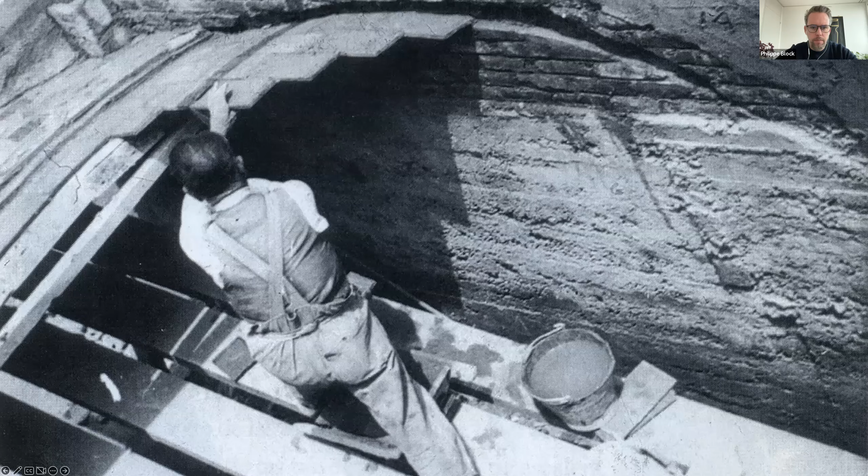Yes, it's perfect. Do you have videos or? It should work though. It's okay. Yeah. Well, okay, I'll quickly try so that we can see. That works now. Yes. Yeah. Okay.

I see Philippe is on. Maybe he has some technical issues. We can't see. Okay. Yeah.

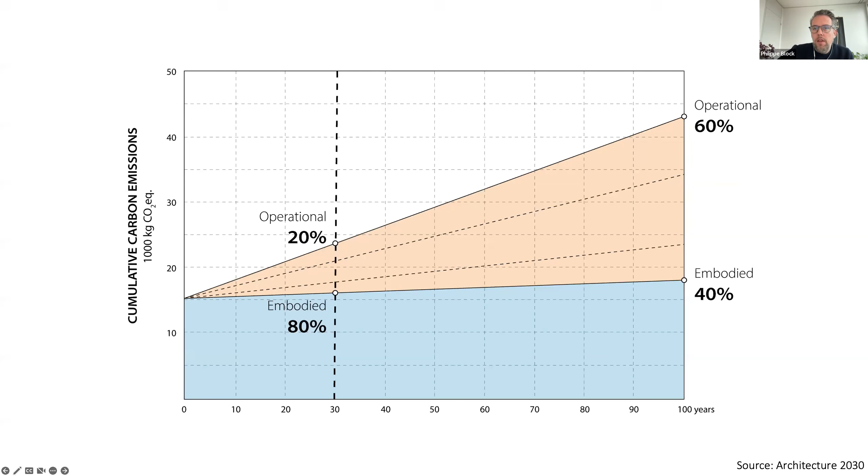Global waste production, particularly construction demolition waste, is adding there, and then also energy. But what I will be talking about today is what I believe is the key bottleneck, the remaining bottleneck, the embodied emissions. Why I say that for me this is really the key bottleneck is because there is actually a rather straightforward solution. There has been for the operational energy.

So there has been so much research, so much development on efficient heating, cooling systems, on better insulation, but also if we were to go to renewable sources of energy. And I just recently, maybe that is old news for you, but I read in the news that the largest solar energy plant was just opened in China. So that is exactly what I'm talking about, that if we can reduce the impact of that energy, then actually, theoretically, we would have a solution to solve the entire operational energy emissions.

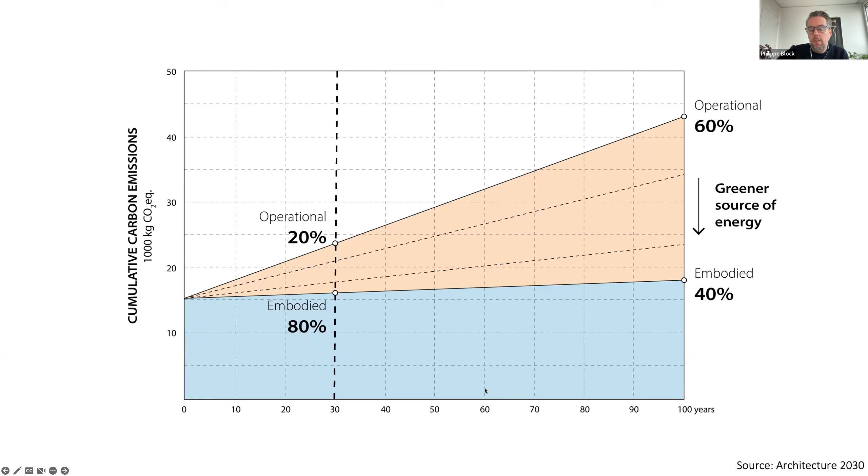So the first one is the one that most people focus on, which is to change the materials that we use, to go to low carbon materials. And I will talk about this later as well. The second one can have a much larger impact, that is actually to reduce the amount of materials altogether that we need. And that's where structural optimization, structural design, appropriate design comes in. And then the last lever, this one, I believe, is probably one of the most important ones indeed, is to actually expand the lifetime of your resources, your components, your structures. So the last one has to do with, of course, circularity and circular thinking.

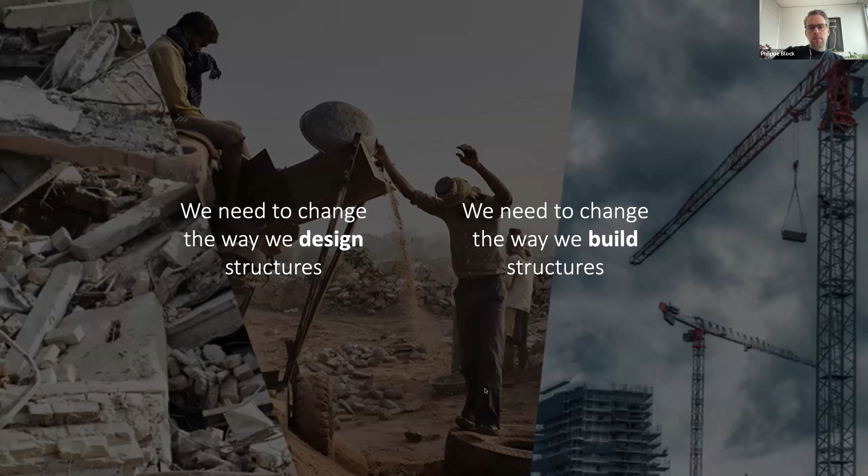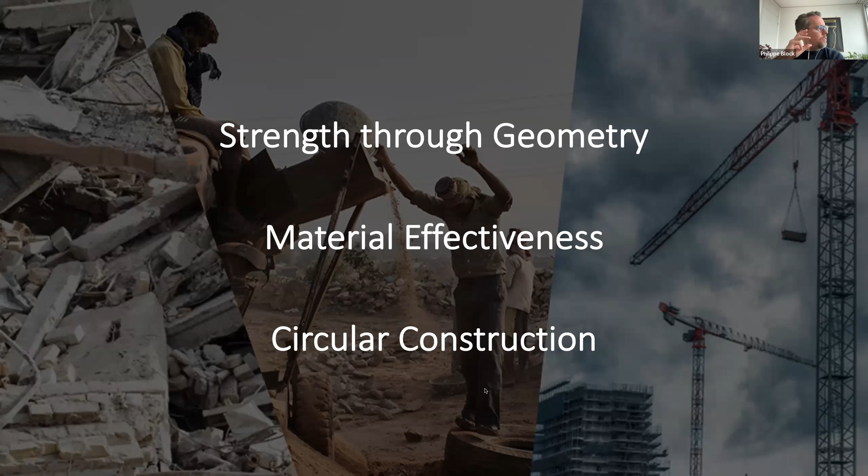So the first one we call strength through geometry. The second one is material effectiveness. Already do notice that I use the word effectiveness and not efficiency, because efficiency often is referred to as lighter, but building lighter, or less material, is not necessarily always solving your problem. If you use very high impact, carbon footprint materials, but very little of them, it might actually cancel out the effect. And then the last one, I will show you how I really believe that we have to also fully embrace circular construction and how we do this in our work.

So the first one, strength through geometry. Sorry for those of you that I have seen already some of my presentations, but I want to set the stage and show that I believe very much in learning from the past and in also assessing traditional techniques, things that make sense, things that were realized in a time where there were constraints, when not anything was possible as in the last decade.

And this is such a beautiful technology that somehow was forgotten, how to build these vaulted geometries from the past, why Gothic cathedrals are still standing after 500 years and so on. So these beautiful structures stand because they have a good geometry, not because you use high strength materials or you reinforce them in very clever ways. No, because they have this structural geometry that makes them stable and resilient after centuries.

But considering that these shells are literally proportionally as thin as an eggshell, this was for me an important trigger and motivation to bring this knowledge back to modern design and engineering. So in order to do that, we have spent the first 10 years. Now I've been almost 14 years at ETH Zurich as professor. And the first 10 years we spent building a lot of prototypes and pavilions to really push ourselves, but also push the acceptance and the understanding outside.

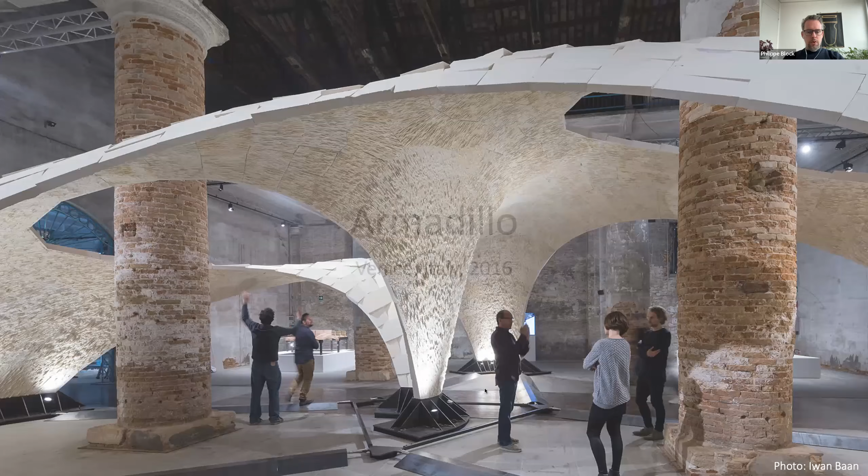So the first project that I wanted to show in the context of strength through geometry is the Armadillo Vault. What you're looking at is a stone vault, unreinforced, out of 399 cut pieces of stone that is assembled without mortar, without glue, without reinforcement. Why I start here is because this is an extremely pure structure following the same logic as why the cathedrals are still standing. And we did this to make that point, to show, haven't we forgotten something, and shouldn't we reintroduce structural geometry to activate humble materials in a safe way, again, as was done in the past.

But the background for this is a long development of tools that allow us to rediscover that structural geometry. So tools based on graphic statics. Again, this will be the topic of the second week of next week. I will be talking about how these tools allow you to, in an open way, really understand how the forces flow by manipulating them and so on. And these tools were then translated into a tool called Rhino Vault by my former colleague, Matthias Rippmann. What we want to do there, and this will be a focus next week, is show how I think it is very important to not build black boxes of tools where you don't fully understand all the parameters, but we try to actually clarify how these things are being developed.

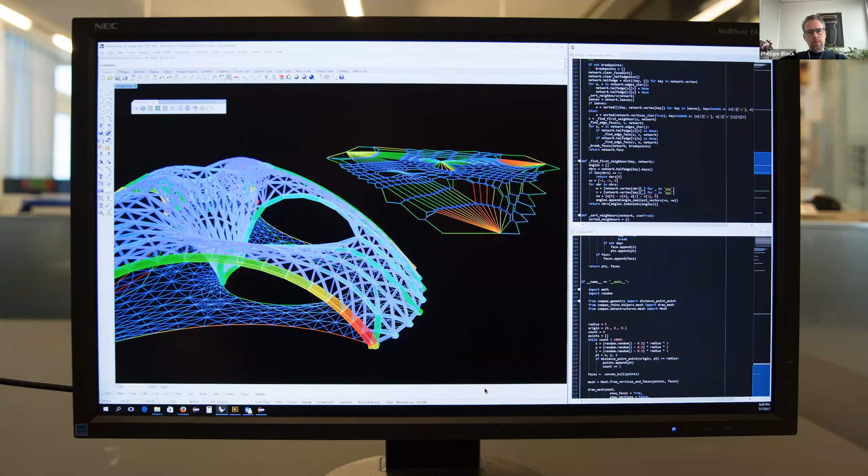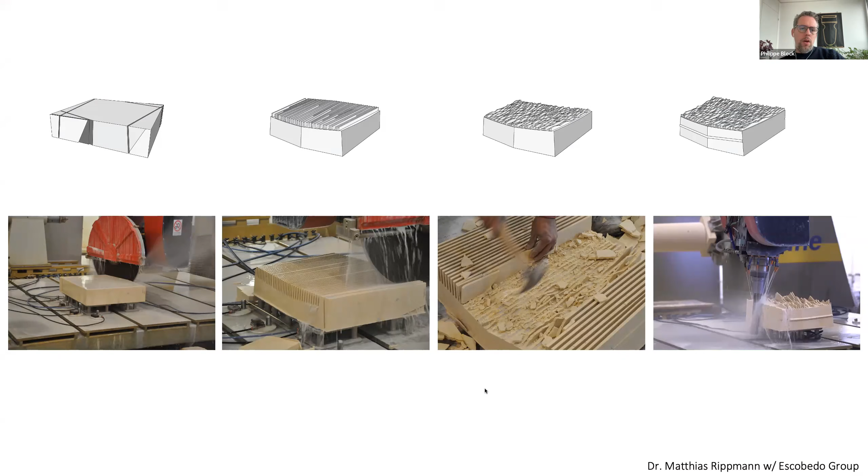Maybe also worth mentioning in this context, and I will come back to this later, is that there is never just one target, not even in a simple pavilion, surely not in a big building. You cannot just focus on structures. You also have to think how to fabricate it, how to optimize fabrication to make it in a timely manner, in a cost-effective manner, and so on. And here are some images of how we looked at the most efficient ways of cutting this stone in order to realize this project in just a couple of months.

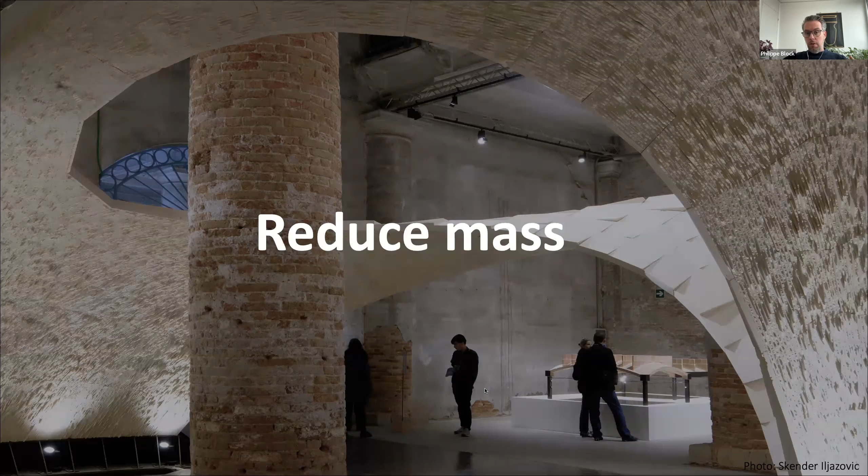But as you see here, the stones were assembled without any mortar, glue, or any mechanical or chemical attachment so that it could be taken apart. So here are some images of how this then looked. This specific geometry had to do with fabrication. But the key message why I wanted to start with this project is that by getting the geometry right, we can significantly reduce the mass needed to realize a structure.

A quick side note here, because this just happened 2 weeks ago: because it was dry assembled, and I will come back to the importance of that later, this entire vault was taken apart. Just 2 weeks ago, I heard from my colleagues in Texas that this vault has been sold to a client in Dallas, Texas, and it will be installed in a park in the next half year. So super exciting that this Armadillo Vault will have a new permanent life in someone's beautiful garden. A second project in the context of, so remember, I'm now trying to argue why we should care about strength through geometry.

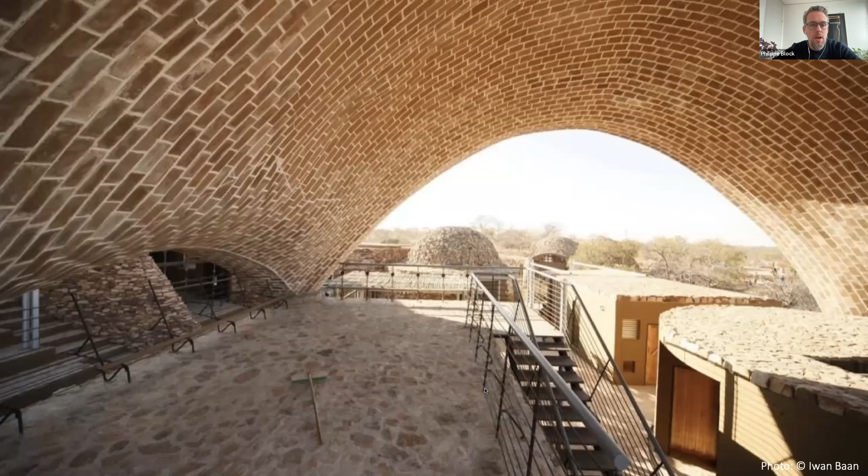A second project is an experience I got to work on, this beautiful project Mapungubwe by Peter Rich Architects, John Ochsendorf and Michael Ramage. I was asked to do the safety assessment of these vaulted structures. What you're looking at here are soil press tiles that are built using a Catalan vaulting technique. This vaulting technique is globally known, but it comes from the Mediterranean.

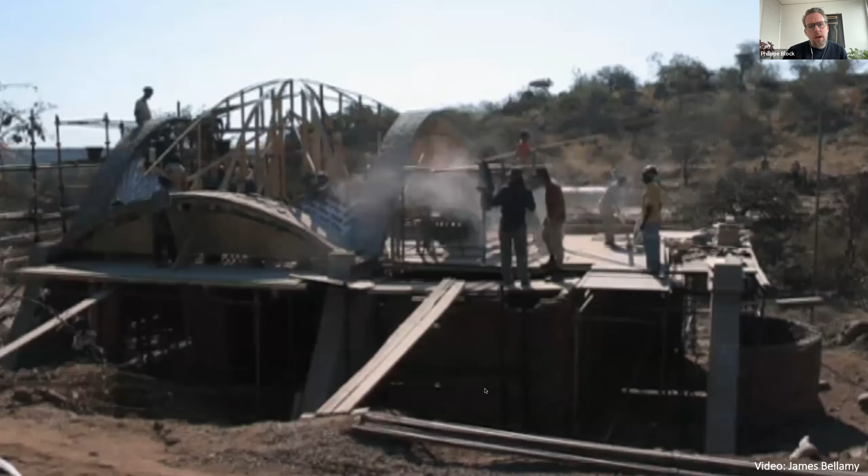So this is how this works. The timber that you see is just guide work to guide the masons to build this geometry. And here, first results. But in the context again of setting the stage here and strength through geometry, what is unique about this project is that the tiles were designed to really reduce the amount of imported engineered materials.

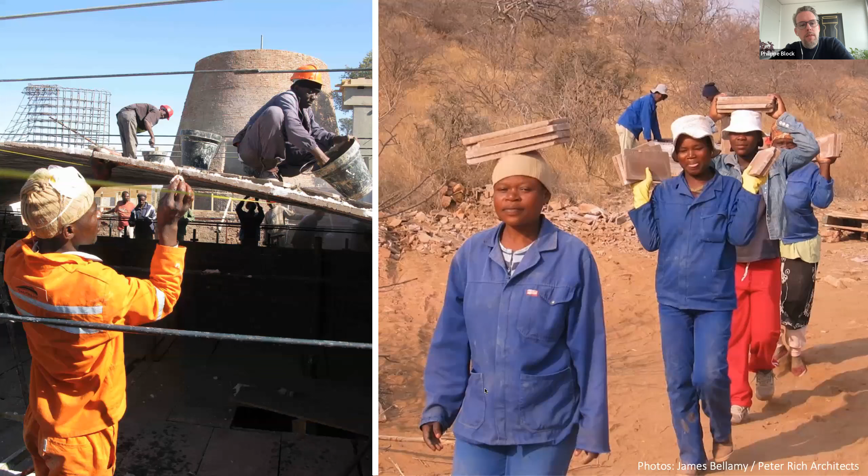Here you see the local neighborhood, the people in the village nearby, pressing these tiles with a manual press using only 7% of cement to stabilize that local soil. This was very important to reduce, and also, of course, the energy input. There is no firing, so these are unfired tiles. And the reason that I explain how they work is because these tiles are extremely weak. They are only designed to take 2 megapascals in compression, which is 10 to 15 times less than our typical concrete.

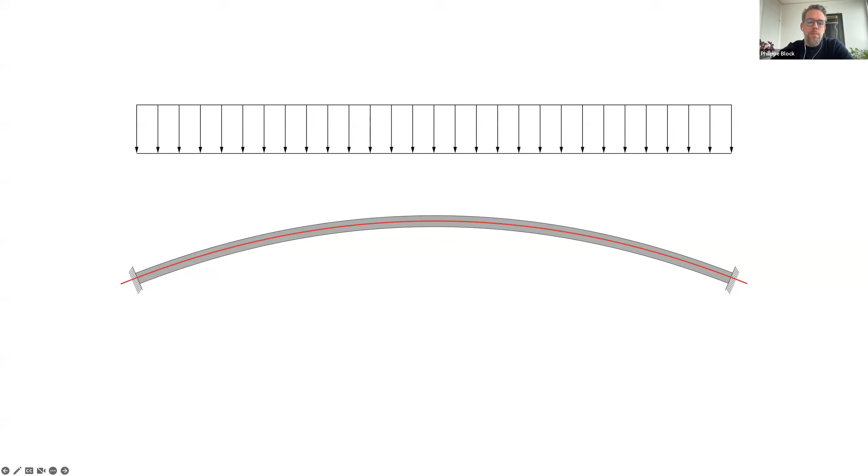But if you place the material where the forces naturally want to flow in compression, then you don't have stress concentrations. You actually activate this material very nicely. That is also why on the right, the women of the town are carrying these tiles in very small packages, because the tiles would just break in bending in front of you. They have almost no bending capacity indeed. Next week, I will talk on how one can design and what is important in getting the geometry right, as I am presenting it here.

So, compression only geometry. How we find the arch geometry, but also how we can assess under what loading cases it is stable. For example, here under a live load, the arch would not be sufficient to contain this. This red line is called a thrust line. It's the resultant of where the forces in compression would want to flow to the supports. And if we cannot find a solution within the geometry, then that means that we would have an issue. This would lead to collapse.

There are different ways to then add a stiffening scheme, as this is called, to the arch. So how we can provide load paths for loading cases other than the design load. Again, that is important to consider: form finding is amazing for discovering a good starting geometry, but it is obviously equally important to have a very rational way to bring

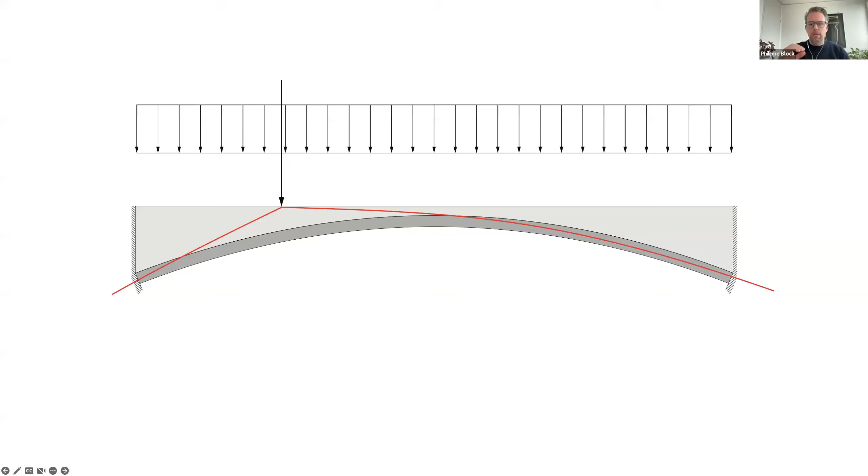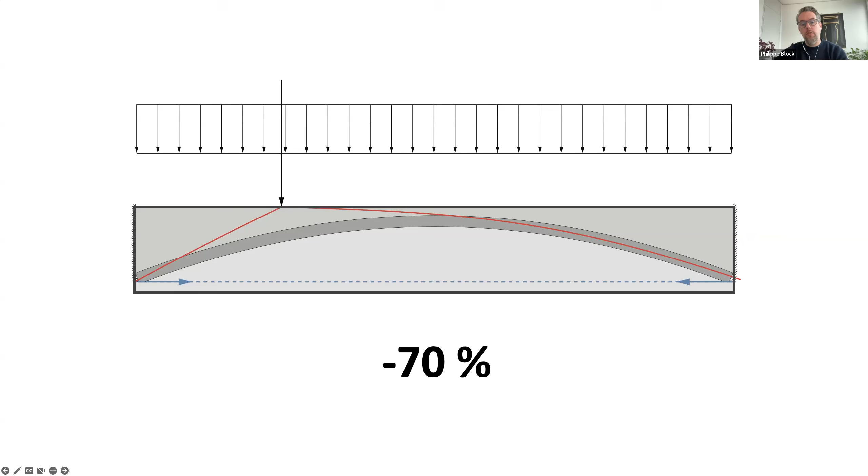So I was talking about the importance of a stiffening scheme to provide alternative load paths through the structure. By just adding a tension tie, what we just did is we replaced our typical reinforced concrete floor plate or beam by a structure that uses 70% less concrete, right? This is a very simple, historic principle, but it allows us to already get these achievements. This was a core starting point of the structure. But the key message I wanted to make here, the first example, was to show that if we get the structural geometry right, we can significantly reduce the mass of the structure.

And then here the second one is that you see that again, we reduce the mass, but on top of that, we have extremely low stresses, which allowed us to use this local material, this low strength material. And there is almost a one-to-one relationship between how much embodied emissions or carbon footprint the material has and how strong that material is. So by activating weaker materials, low strength concrete, for example, we can significantly reduce what is called the embodied carbon coefficient of the material. So that is a second reason why I really care about reintroducing structural geometry.

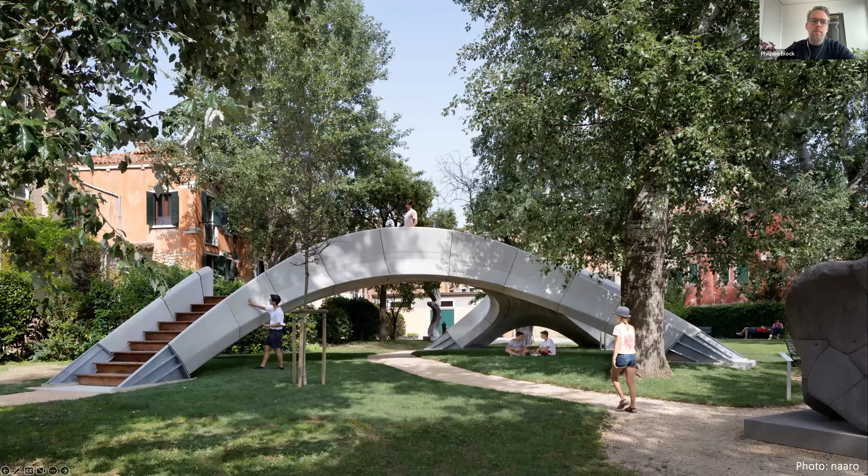So we recently, this was a project in 2021, again, in the context of the Venice Biennale, we did Striatus. And of course, again, there is some amazing work being done by Philippe and his team here with you in Shanghai. But what we wanted to show with this project is that I consider concrete, so not reinforced concrete, but concrete, the compression part, as an artificial stone, which is indeed happy in compression, like a brick, like a stone. So what we wanted to show with this project that we did together with Zaha Hadid Architects was that instead of considering 3D printed concrete as a formwork for the real structure, if you understand concrete as that stone, then you want to design it as an unreinforced masonry bridge. So this is a fully unreinforced concrete 3D printed structure.

So in order to achieve this, we apply masonry logics at two levels. On the level of the global discretization, we actually have a masonry system like a Roman arch, but then also on the level of the printed layers, we basically have a perfect alignment through this 3D printed structure. So that means that we used all our masonry knowledge and toolbox, and that is maybe why I showed you this before, to design this kind of geometry.

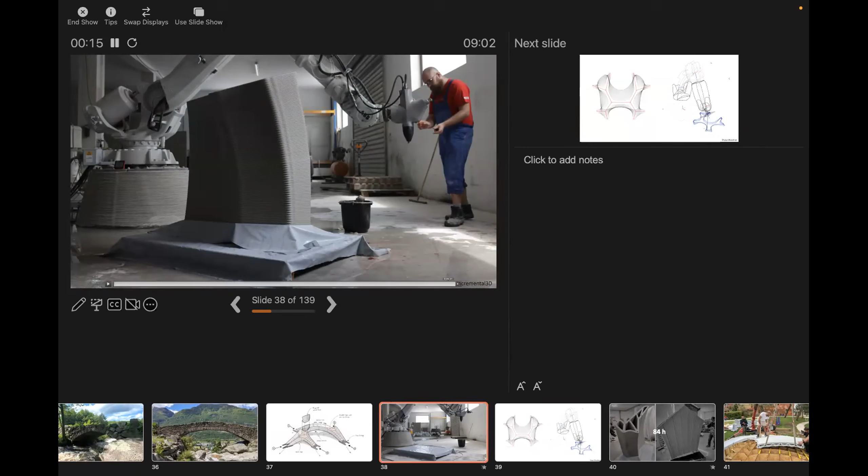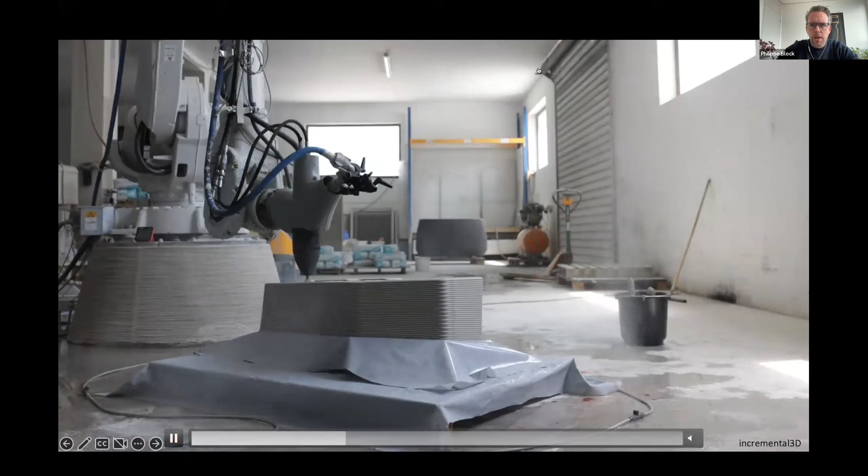All right, so in order to achieve this, we use this concrete 3D printing, non-standard, so non-parallel concrete 3D printing, and of course, sorry, Philippe. What we are looking at is the presenter mode. So we see two slides. Okay, do you see it now? Yes, that's perfect. Thank you. Okay, sorry. Thank you for that. So, or maybe I'll share the right screen then. Perhaps that's maybe better. I'm really messing this up today. Apologies, everyone. But we'll get there. So here, this one, desktop share. So now you should see the right screen, right?

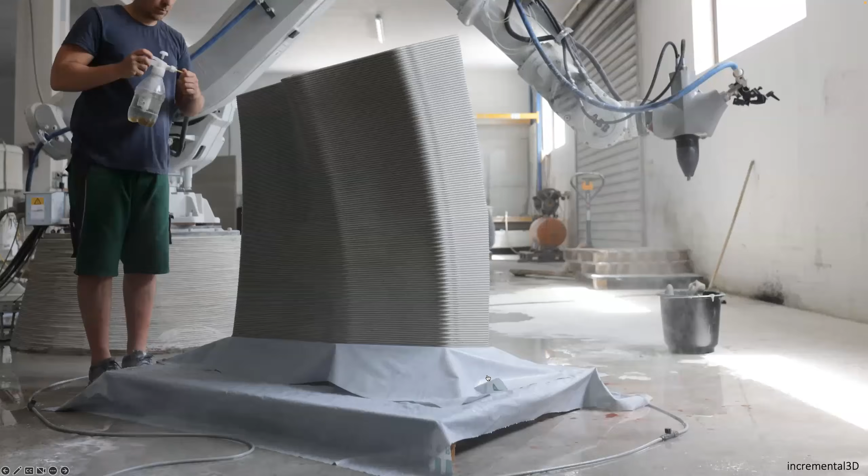Yes. Okay. So what I wanted to say here is, again, what's important to consider is that we have this masonry on two levels. And so we encode these constraints really in the print paths. So what we do is globally, we control the discretization like a masonry stereotomy, and that defines your start and end planes. But then anything in between, that is what's shown on this slide. There we actually let the constraints of the printing logic speak. So that means that anything in between, the geometry is implicit.

So we don't control the geometry that we slice, but we actually generate the geometry based on the print paths: how much overlap can every print path have, what is the perfect length of the print path to make sure that the speed is correct and the hardening is correct, and so on. So that is the slide that I was looking for. Here you see that globally we have this discretization that gives you these start and end planes, and that is important to have globally a compression only structure, but then locally you really want to make sure that everything is printable. And so we embedded all of these constraints into our design framework so that every single block would come out, as you can see, very cleanly, very precisely, and without any issues.

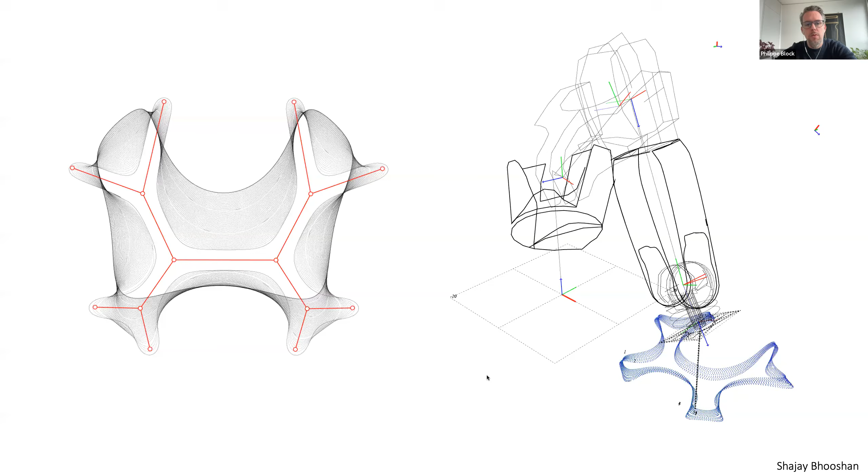But so then of course we have a situation where we can really celebrate all the opportunities of concrete 3D printing. Here on the left you see that. And remember the stiffening scheme, we add, for example, stiffeners to increase the structural depth, but we don't want to add all of that mass. We just need it to provide load paths to the structure.

So here on the left, you see that we hollow out these structural elements to really effectively increase structural depth without adding weight. So that is possible with this 3D printing. So you see that we can place material only where needed. And then on the right, again, you see these print paths are not just straight, they're also inclined in two directions so that they really are aligned to be as orthogonal as possible to

the force flow. Another thing which is very powerful about concrete 3D printing, or 3D printing in general, is that this 21 meter diagonal bridge with 53 blocks was printed in a total time of 84 hours, right? So this is another aspect that is important to emphasize in this rethinking of how we build: being much more efficient in how we go to the building site, what is done in prefabrication, what is done on site, how fast we can deliver is a crucial aspect that we need to change.

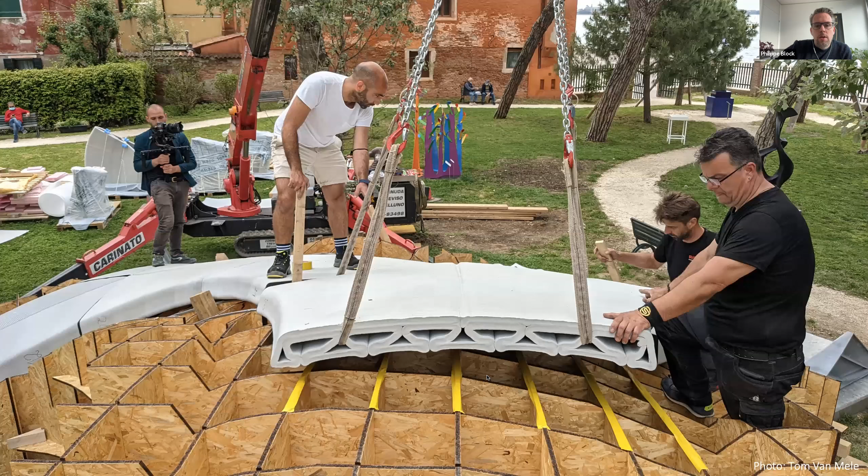So that means we had these super lightweight 3D printed elements that could be assembled very simply, and we assembled them without any connection. So we only have, you see here on the left, this little black interface material. You see this here as well. This interface material is to distribute the stresses so that there is no local stress concentration that can cause a crack. And the reason that we dry assembled it is because I wanted with this project not just to make

a statement about concrete 3D printing, but really about highlighting that if we use concrete as the artificial stone that it is, so we really appropriately use the material, we can offer all kinds of circularity opportunities. So the first one is the one that most people focus on. Can we reduce the amount of material? Can we reduce the amount of molds to realize this structural geometry and so on?

But indeed, like what we demonstrated here, if you keep materials separated, so if you don't have embedded reinforcements that can corrode over time, then you can have a very clean maintenance and repair strategy. If you dry assemble and use the masonry logic to have a beautiful, not only self-registration, but also a stable connection without needing any glue or mechanical fasteners, then you can take it apart again. And that means that you can reuse all the components.

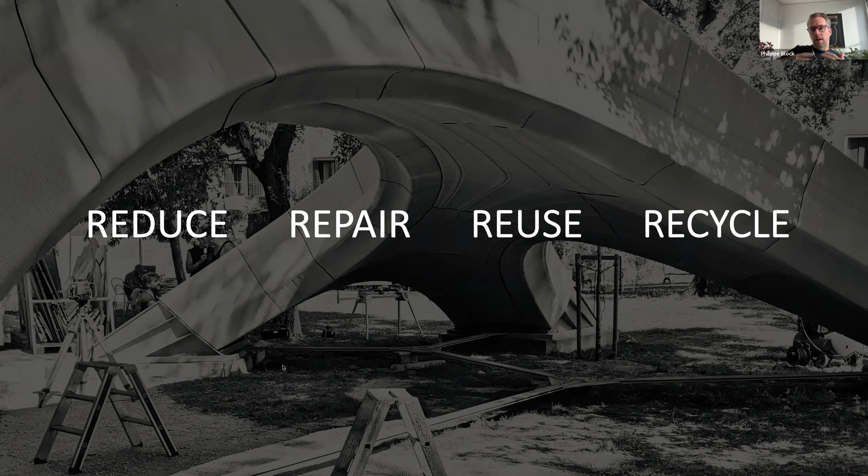Maybe you might think, what is the purpose of reusing this bridge? But more globally, you will see in the second main project that I show you later that reuse of prefabricated elements is a very important outlook for the end of the lifetime. And then lastly, something that we have done in this bridge is we have designed it to be easily taken apart and easily recycled again because of this clean separation of materials. So this is how it looked.

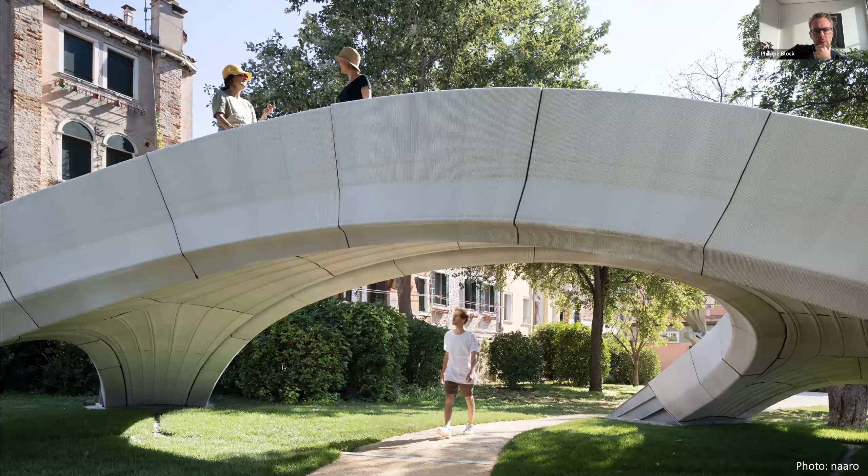All these features had to do also with some fabrication optimization, but I want to keep going forward, so I will not talk about those today. But look again at this image, right? Why we managed to build this pure structure is because we were consistent throughout, and we had a fully integrated pipeline that made sure that we globally have this masonry discretization orthogonal, perpendicular to the main arches, but also on the level of the elements we have this perfect alignment.

And as I highlighted, treating concrete as a discrete masonry system gives you all kinds of circularity opportunities. So again, appropriate, I think, for the context of this class, is that all these things don't just naturally come together. We don't design something independently from the engineering logic. We don't design something that we need to still check if it can be fabricated or figure out how it will be fabricated. And so this project was a very holistic approach with 3 different teams in

3 different locations. This project was done in the height of COVID. So the different teams actually never met in person. We did the entire project over Slack, over computationally. And what I want to point out here also is that we actually condensed the process by, from the beginning, talking about the interfaces. What does the engineer need? What does the architect need to discover all the possible iterations of design? What are the constraints of fabrication?

And all these interfaces were discussed from the beginning so that the 3 teams could develop at the same time. And then at the end, everything could be brought together. So the 3 main teams were our group, the BRG, then ZHACODE, the group of Shajay Bhooshan, and then Incremental 3D, the concrete fabricators from Innsbruck, and then the sponsoring, but also the specific ink was done by Holcim.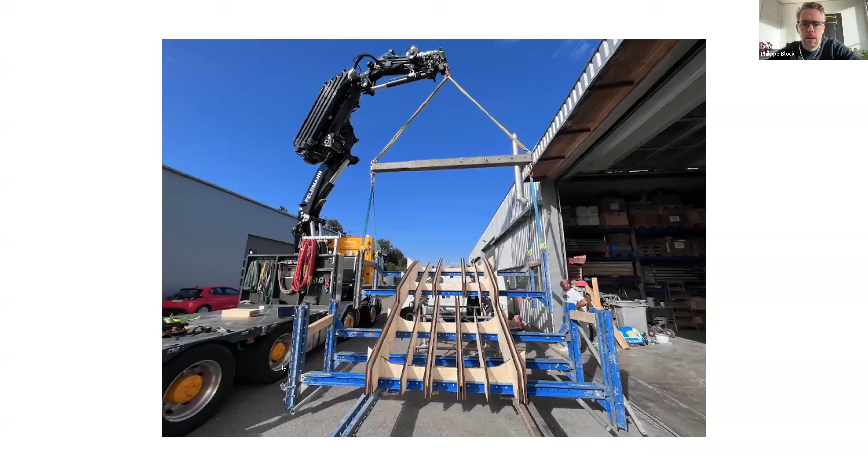I wanted to share something that no one has seen because we are building a permanent bridge with a 50-year design life in Lyon. That is Striatus 2. It's called Phoenix. And Phoenix because it will return from the ashes. The new bridge will be 100% construction demolition waste, so it will be printed with no new cement, no new aggregates. So everything will come from the old bridge and other construction demolition waste.

And what I'm showing you here is for us a key bottleneck of really celebrating and showing the opportunity of concrete 3D printing: optimizing the assembly on site. You saw that we had this rather inefficient scaffolding, this waffle structure to assemble the bridge. So what you're seeing here is we're developing a very robust system that uses more than 90% rented standard scaffolding elements. And then we just have these very lightweight baskets, where we already assemble multiple pieces at the same time, so that in a very controlled environment, not in the air, we can pre-assemble the structure in big chunks, and then it's lifted in a few controlled maneuvers.

So this will not only speed up the assembly, also improve the tolerances and the control, but most importantly, get away from almost all single-use materials. So just this small strip, these small baskets that we made to assemble the structure. So I wanted to show this a little bit because we are continuously evaluated, self-critical. We're evolving to really push the state of the art, but always step by step.

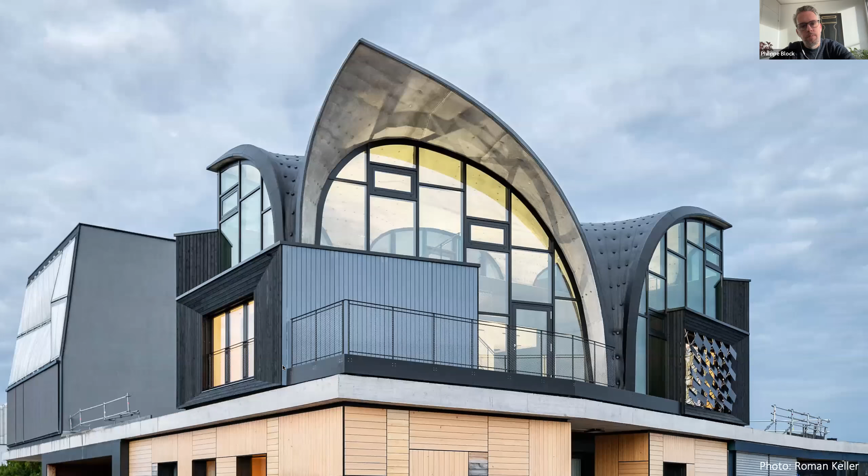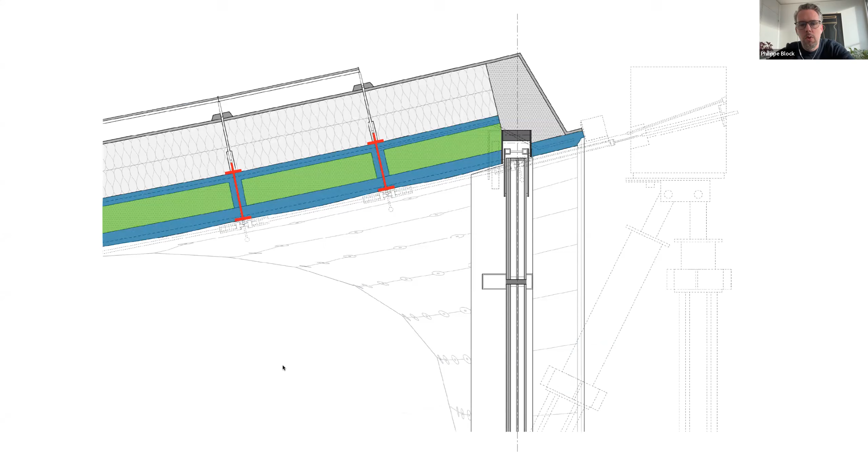Okay, then the last key project is Hilo, that we just realized. Maybe I'll talk first a little bit about this roof. What's special about the roof is that it's a shell structure, a very thin structure, a double layer shell. So we made a sandwich shell that is connected only with these steel connectors. And you will see that these steel connectors also have something to do with how this roof was realized. And then the two layers that you see are 5 centimeters and 3 centimeters only of concrete to cover almost 180 square meters of roof.

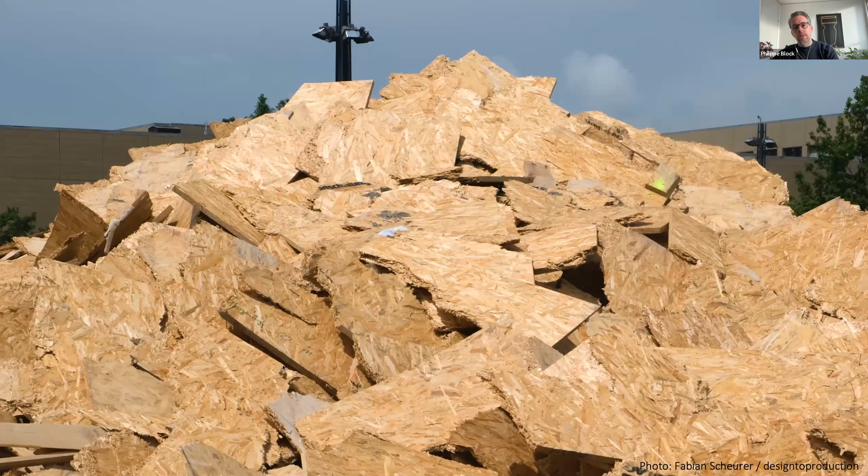The thing that we wanted to show with this roof was that getting the geometry right, surface structures in concrete are very efficient, but also need a lot of scaffolding, need a lot of support to build it. And unfortunately, this mold that lasts only 28 days often turns into this after the concrete is hardened. So what we wanted to show with this project is, can we get away from this single-use material and the inefficiencies also on the formworks needed, on the foundations needed, on all this scaffolding and so on? Can we resolve this with a flexible formwork?

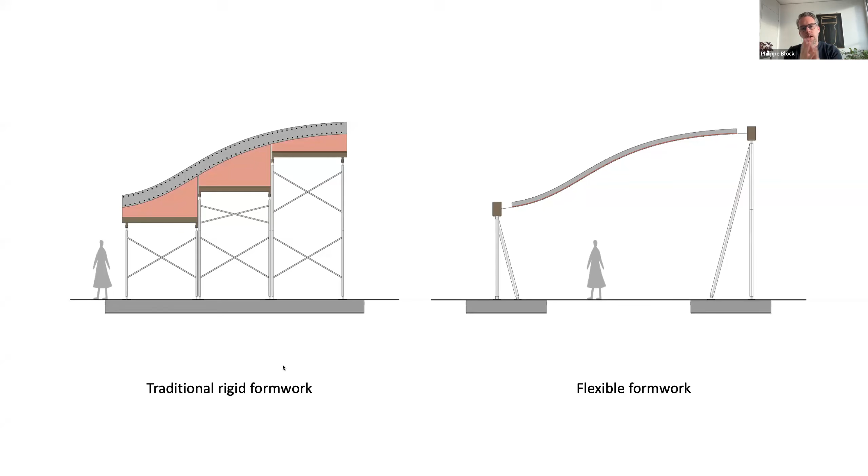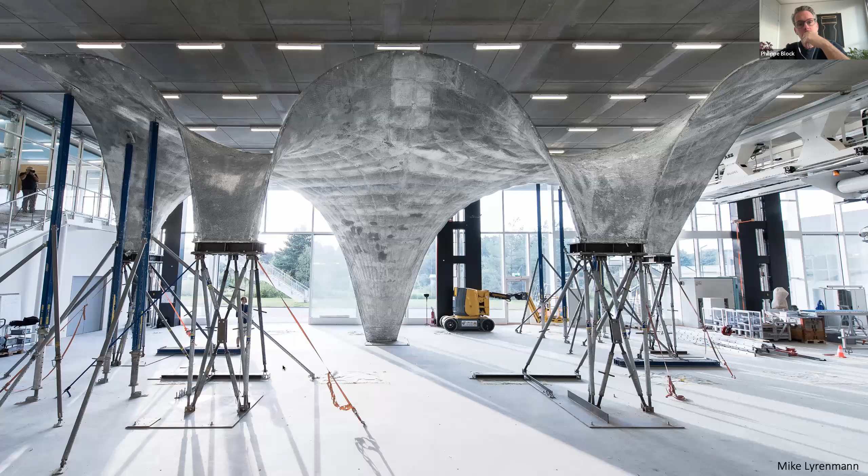So we developed this kit of parts, this tension system that allows, just with very light, simple, reusable parts, to realize this shell. And on top of the shell, we put then this fabric. This was still in the hall when we did the one-to-one prototype. I'm happy to talk about this as well, that I believe that innovation doesn't just happen in one day. It's always a lot of development. It's building up of knowledge, but also of trust and experience by building real scale prototypes. So we have done a lot of this. So here you see this full scale prototype in our hall at university at ETH.

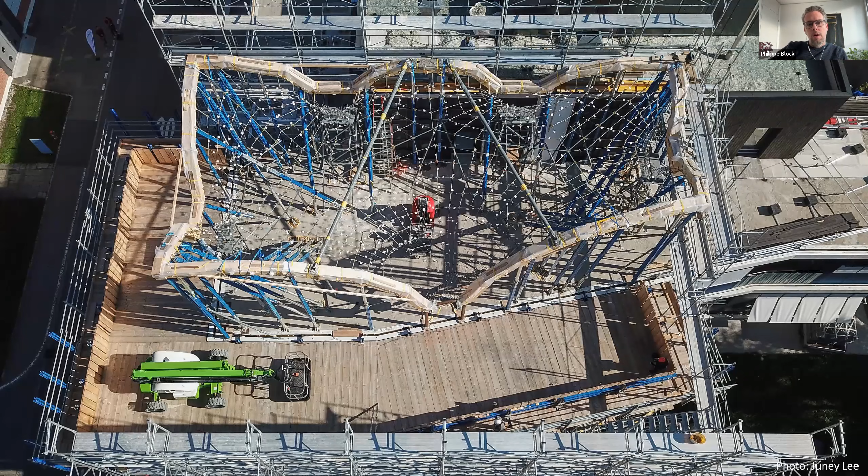But then the same kit of parts, tweaked because we updated the geometry. We learned from the prototype. So 85% of the pieces could be reused to then make the formwork of the final structure. Again, putting the fabric in, and finally we could apply the concrete. In this case, just to be clear, this is not a compression-only geometry. It's more kind of like a Felix Candela shell.

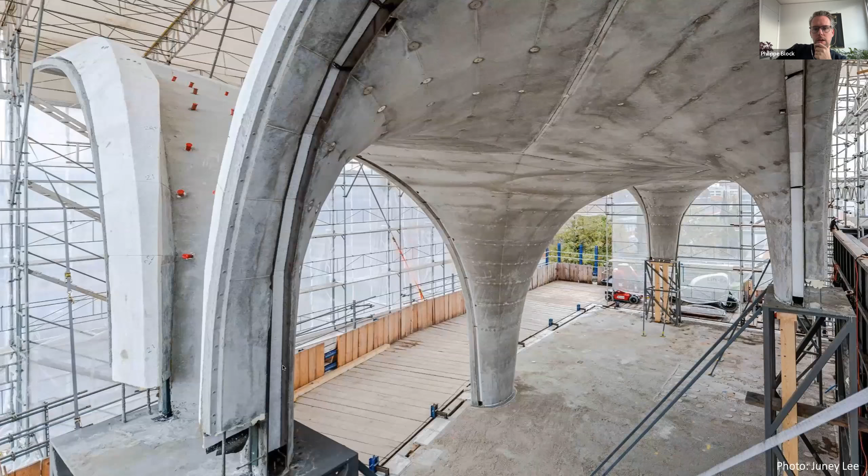And so here you see also that the first layer, because we only have one layer of super thin reinforcement, the first layer has quite some fiber in it to make sure that we don't have any small cracks and so on. This was just after decentering. But I wanted to talk a little bit about this roof, so I didn't give you too much detail, but

I wanted to talk about this roof because for me, the key thing that we achieved there is that this is an innovation that didn't happen in a clean kind of prefabrication workshop, but it happened on site with real contractors. And the key that this worked is that, and here you see an exploded detail of this node in our kit of parts, is that we developed a node that had these vertical elements that allow to work on site to reduce the complexity of your crazy roof into something simple, because you always had this local reference on what to do, where to attach the reinforcements, how thick does my layer need to be, and so on and so on.

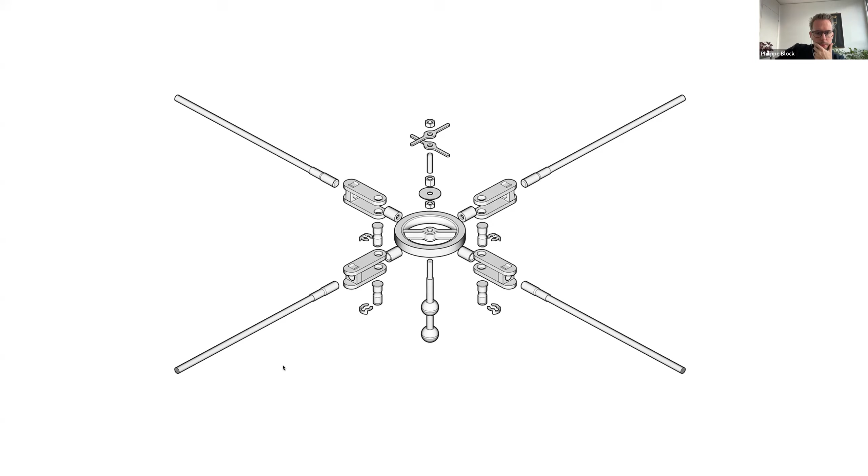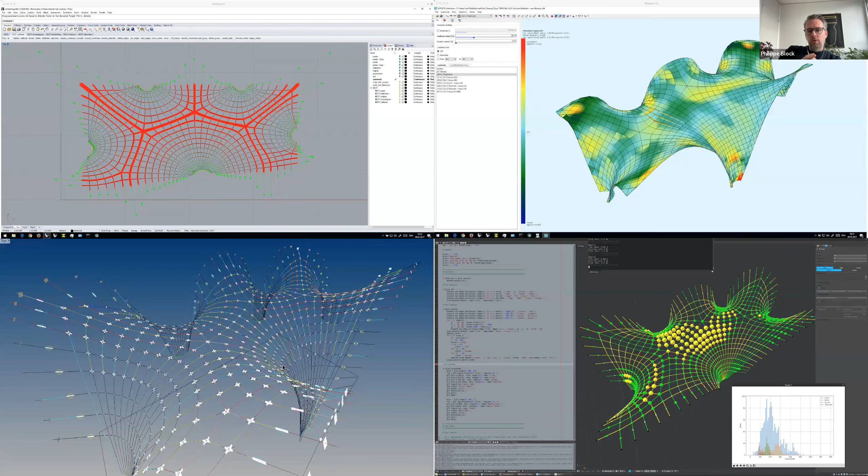But Tom will talk a little bit more about this project, because this project was done very consistently using COMPAS for everything. Here you see on the top left the form finding of the cable net formwork, the constrained digital fabrication, making sure that these thousands of components all come out perfectly and have all the constraints that you need, coupling every single iteration with a finite element analysis to make sure that it works and we can really explore the design freedom, but also to include new ideas of the control system that was used to pre-tension the fabric.

But Tom will focus much more on how COMPAS was used to coordinate more than 40 subcontractors, many of which had absolutely no digital expertise or complex geometry expertise. So again, Tom will talk about this in the third lecture. But so this is the roof, but why we are so excited about this project is because of the floors that we showed there.

And maybe quickly zooming out here, we all know that our population is still significantly growing and that we're expected to be at least 2 billion more people by 2050. Bill and Melinda Gates calculated in 2019, and this is of course a calculation based on how we build right now, that in order to provide all the housing and infrastructure for all these people, we have to build the equivalent of 1 New York City every month for the next 40 years. So that is a gigantic challenge.

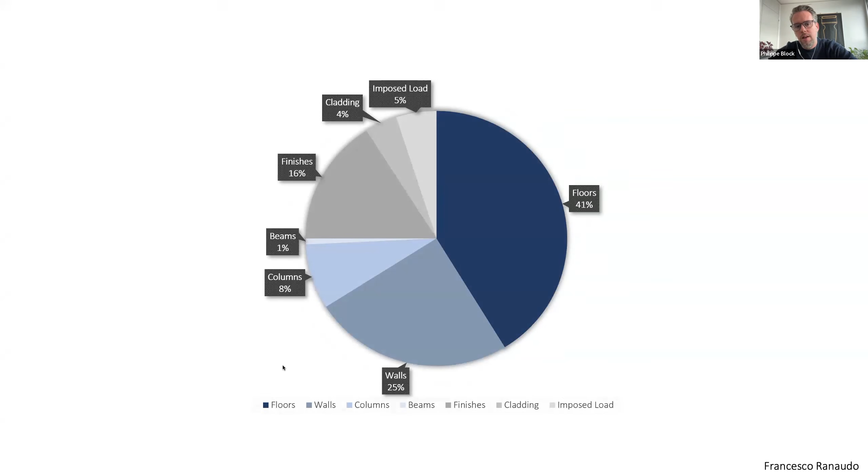So let's look at this building, the typical medium high rises, so 20 to 40 stories, that are popping up all over the world. If you look at these structures, you see something really remarkable, that at least 3/4 of the mass of that building is in the structure. So that means that the structure is there to keep itself up more than anything else, more than the finishes, more than the users, and so on. And if you zoom into that structural mass, then you see that more than half of that structural mass is in the floors. So 40% at least globally of the weight of all these buildings is in the floor plates, right?

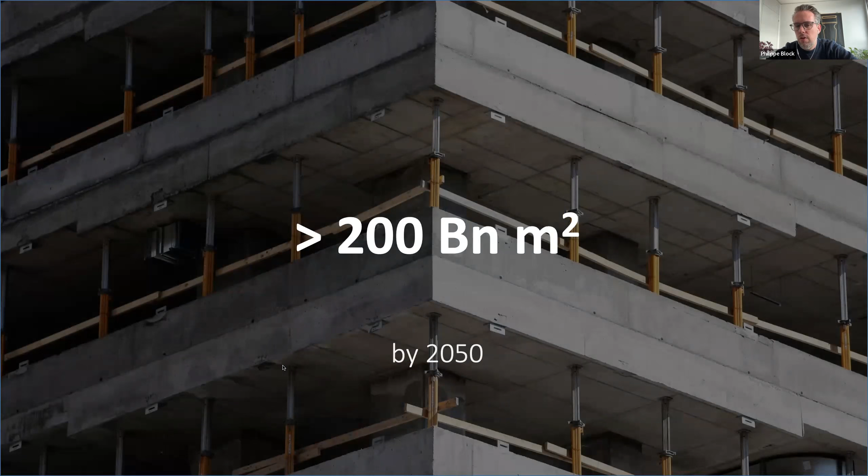So again, considering that more than 200 billion square meters of these floor plates will be built in the next 30 years, can we do something about this? Can we build them more efficiently than what we have been doing now? So this is maybe a moment to talk about material effectiveness and talking about concrete. I don't know how it is in China, but where I come from, where I work here, there is a very active concrete shaming going on. People say that concrete is bad, bad, bad.

You shouldn't build in concrete. Well, it has a really large impact, but is it correct to just talk about the material? So is concrete the most destructive material on earth? Is that correct? So you probably already can imagine where I'm going with this.

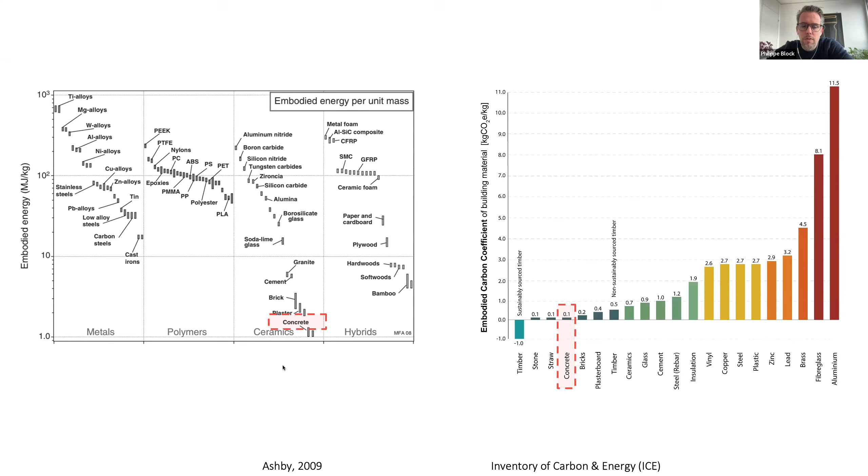If you look on the left, and both are per unit mass, these are on the energy side, the embodied energy, and on the right, the embodied emissions, then you see that concrete, and this is even traditional concrete, this is not the new types of concrete, is quite good as a material. In fact, it's one of the best materials. So maybe it's not the concrete itself that is the issue, but it's how we are using concrete.

And so I argued before that I consider concrete as an artificial stone. A stone is happy in compression. So these kind of geometries, but also constructional logics, will really make a lot of sense for this material. And indeed, by not forcing this material to be in a geometry that it doesn't want to be, you need to add all of this additional volume. So we already looked at this in the South Africa context.

But what I didn't emphasize is that it's not just about not having this natural flow in compression, but also you're forcing a certain force flow that also needs 90% too much steel. And that is not unimportant because the steel is significantly higher, both on the energy and certainly on the emission side. And the one, by the way, that I'm highlighting here is 100% recycled steel. If you go to virgin steel, then this would be not 10 times higher than concrete, but 30 times higher than concrete. So this is important to look at here.

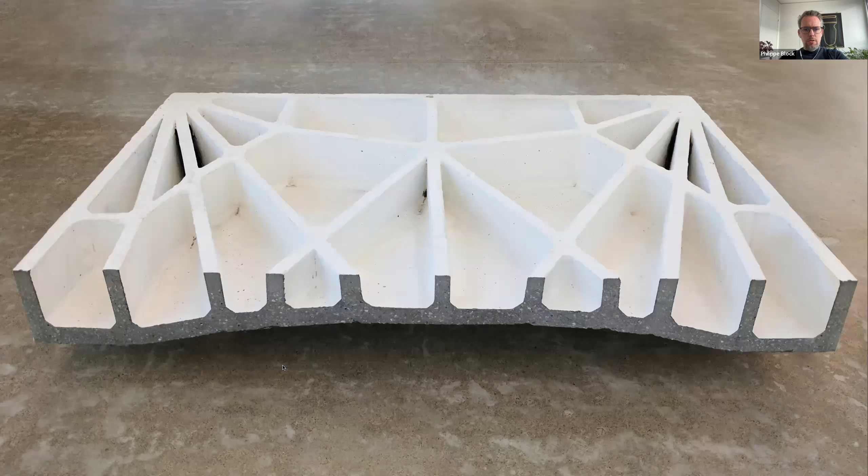So, and when you start to reduce and optimize, then you will see that actually the contribution of steel is really significant compared to once you start to use the concrete how it wants to be used in compression. So we developed this in 3D. Again, I want to emphasize that the compression part is entirely unreinforced. So same principles as in the bridge, we separate the compression flow from the tension flow in order to have clean materials that are easily recyclable, that are aligned to where the forces want to go, that are nicely low stress also, so low strength material.

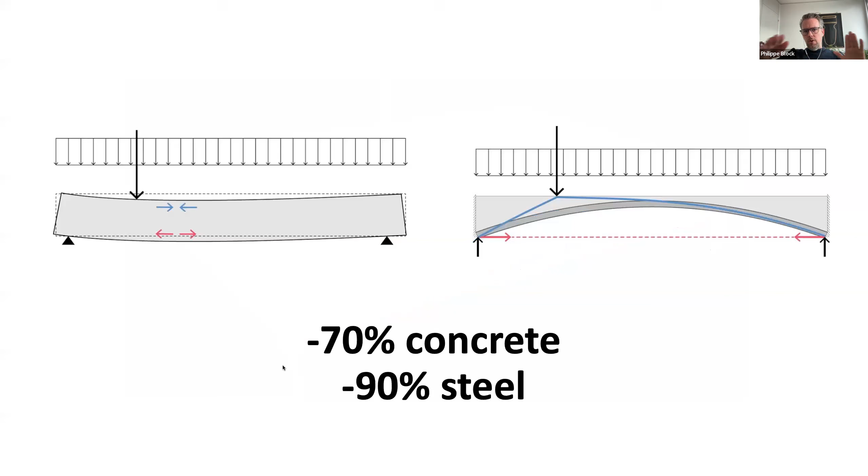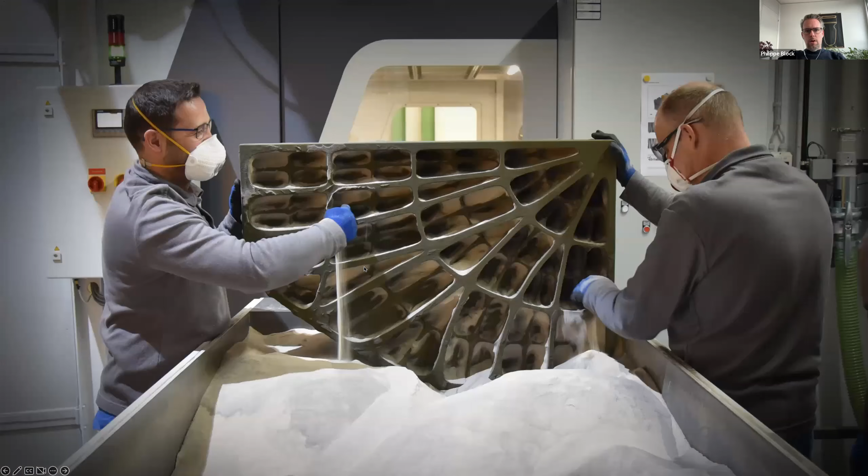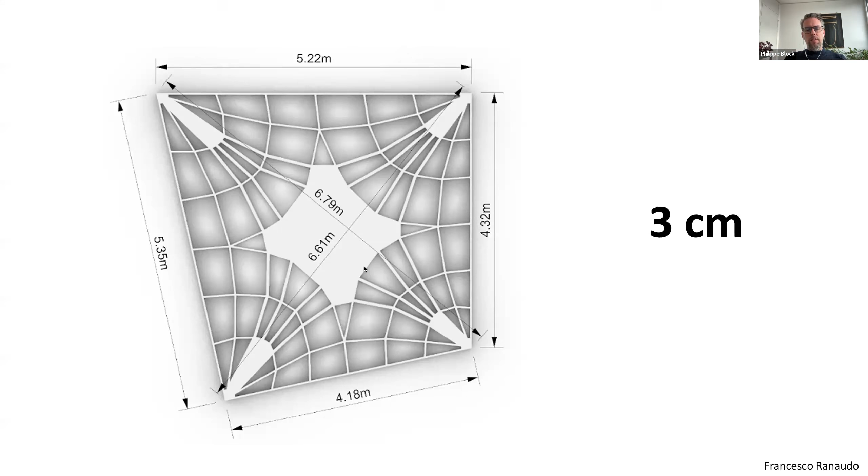And that is basically what we have done for these floors. So these floors, if you're in Zurich, go visit this building and go check out these floors, because now you know that this 5 by 5 meter span is spanning with only 3 centimeters of unreinforced low strength concrete. So this is what you see here. I included a few slides that are kind of confidential, but I thought it was maybe important to show you a little bit more insights than the typical overarching lecture that I give. So here you see some details how it works.

You also see that we embedded some hydronics, some heating and cooling that allows us really to activate this surface to get more out of the concrete. But I want to say that this is something that I would never do again. And I'll explain why. I think it's important that you don't embed things that make it harder to recycle, but also make it harder to upgrade. So here these pipes are embedded in the concrete. That means that if we want to try another layout, or we need to upgrade the system, or we want to change the system, then these pipes are stuck and you cannot do that.

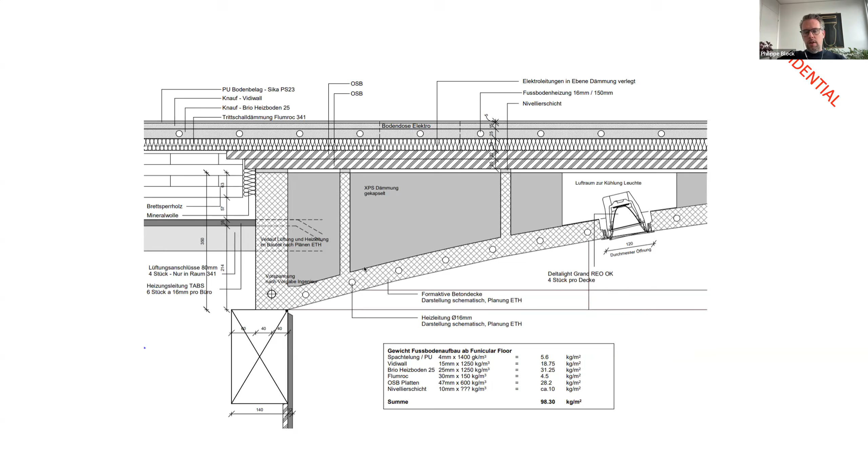Another thing that is of course important, and I mentioned this earlier, is that we don't just want to look at structural conditions, but also non-structural ones, for example, acoustics. And typically lightweight construction has an issue with contact noises, with low frequency noise transmission. And here what we're doing, we're actually using structural stiffness rather than adding mass to be very efficient in acoustics.

So this is showing for the 3 centimeter naked shell that we already have an effective reduction of 42 decibel. And then of course, with all the typical finishing layers, we're perfectly fine. So that also means that compared to other lightweight structures that don't have this structural stiffness to be very efficient for acoustical reasons, we will always be lighter. Because in the Eurocode, they require 350 kilograms per square meter on average to guarantee acoustical performance. But here we don't have to reintroduce that material.

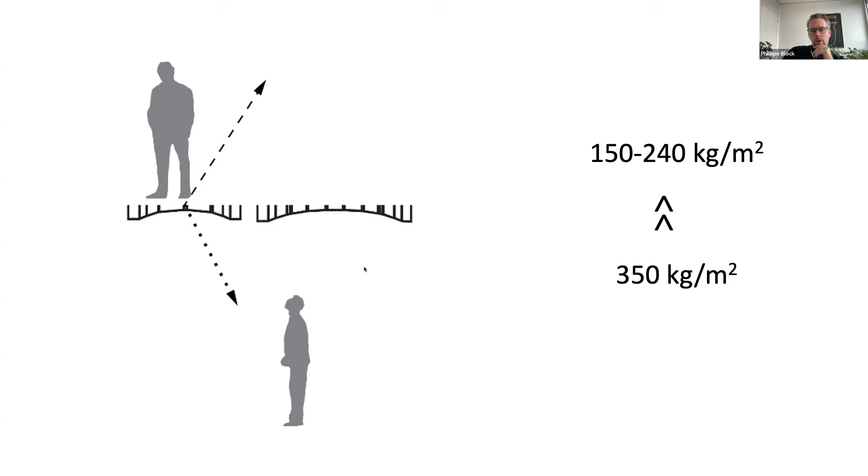So what I'm saying about reintroducing, a lightweight timber structure, when built here, you have to add material to it in order to solve the acoustics. That is why actually in timber construction, you often have these hybrid systems with this additional concrete on top in order to solve acoustical, but also thermal issues.

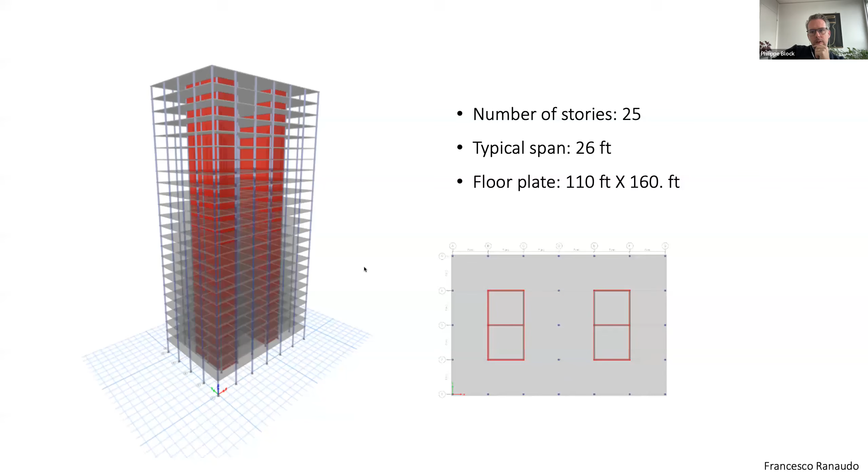So again, zooming out a little bit, why I'm so excited about what we showed there is because if you again look at these buildings, and let's take a 25-story building, then you see that 40% of the mass is in the floor. I talked about this, but we will also take these reductions. Here you see that we don't have 70% and 90%. That is because here we are designing for a 2-hour fire rating. So we need to reintroduce a little bit more material.

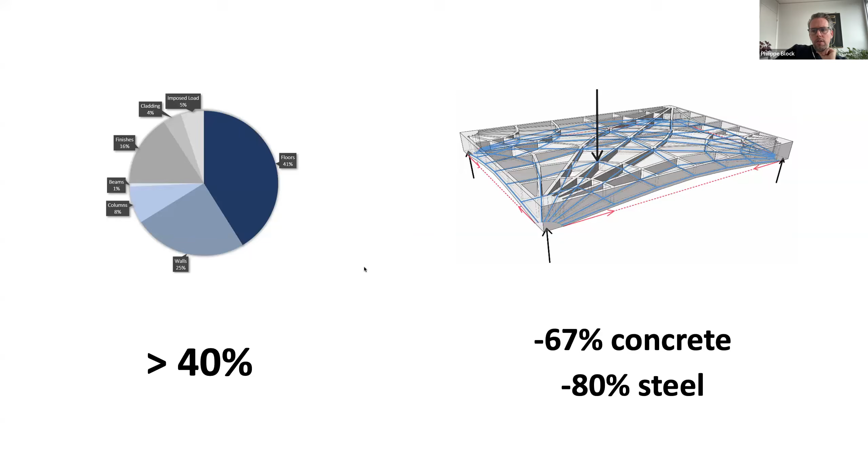But if we were to replace the typical reinforced concrete floor plates with the system that I just have been showing to you, this compression-only floor plates, then you would save 7,500 cubic meters of concrete for this building, which translates to more than 1,200 concrete trucks that would not have to go to this one building site. Or per floor, you can save more than 20 kilometers of reinforcement, and that means rolling it out from Zurich to Brussels, which is more than 600 kilometers of reinforcement that you would save for this one building.

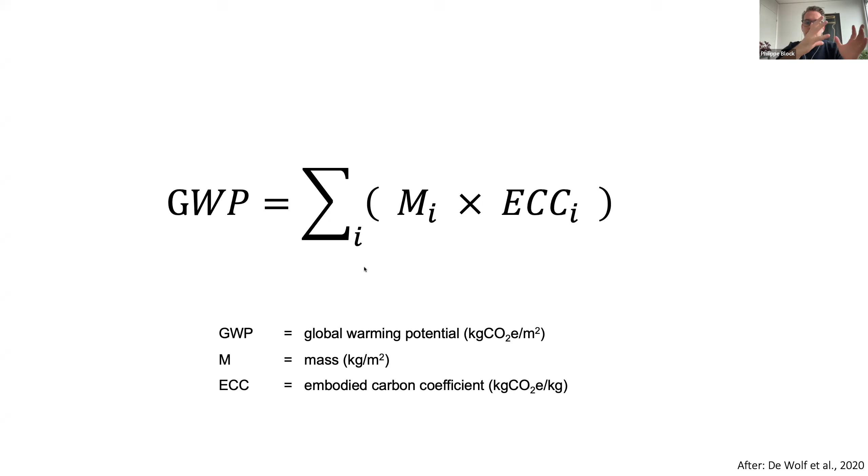But again, let's not get ahead of ourselves, because I made a big statement in the beginning that actually it's not just the mass, the volume that matters, but it's both the volume and what you do with them, and what type of material you use. So it's both the mass, M, and the embodied carbon coefficients, the ECCs. So summarizing what I've been trying to argue is that through structural geometry, you can of course work directly on the mass. And then the embodied carbon coefficients, you can of course start to change the materials.

And there are so many rapid developments in concrete development, all kinds of clinker replacements for the cement, alternative binders, calcined clays, the use of industrial waste products, and that actually you can really get much better concretes today than the ones that we used to use 5 to 10 years ago. But another thing that I've been talking about is that if you get the geometry right, you also can reduce the stresses. And that also allows you to activate lower strength, lower carbon footprint materials.

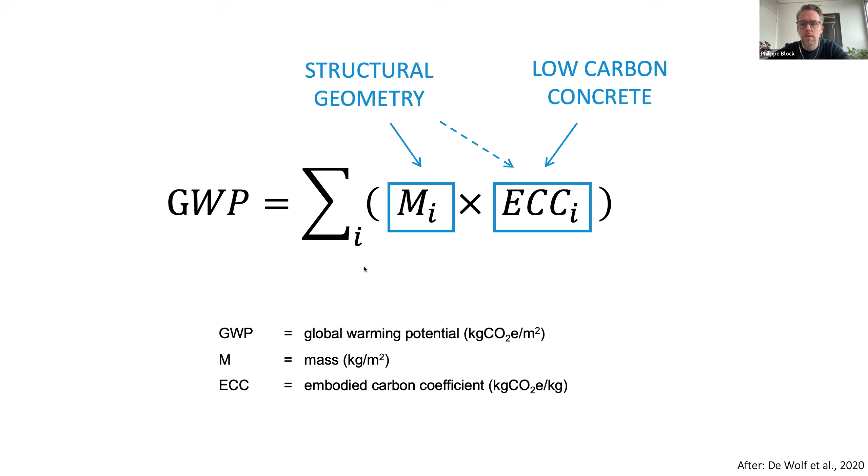So let's look at what that means for this floor plate. The first two aspects come from strength through geometry. So less mass, that's directly this volume reduction in concrete. Lower stresses, so going from a more typical C30/37 to a C16, so really a low strength concrete, gives you an additional reduction of around 20% on the global warming potential. And then with the new types of concrete, so not the typical CEM I, the ordinary Portland cement, but for example, the CEM III or III+ mixes, you can reduce the impact of the material itself by roughly 2/3. So that means that on the concrete, we have a global warming potential component of only 9%.

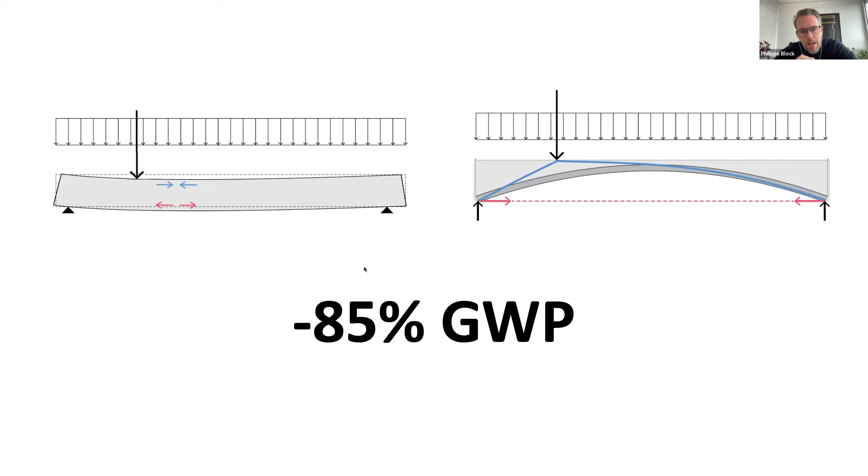And then, of course, we have the reduction of the steel. So that means that we now, by reintroducing good structural geometry, have a floor plate that can reduce the global warming potential of our typical floor plate by 85%, 85%, right? So this is not incremental.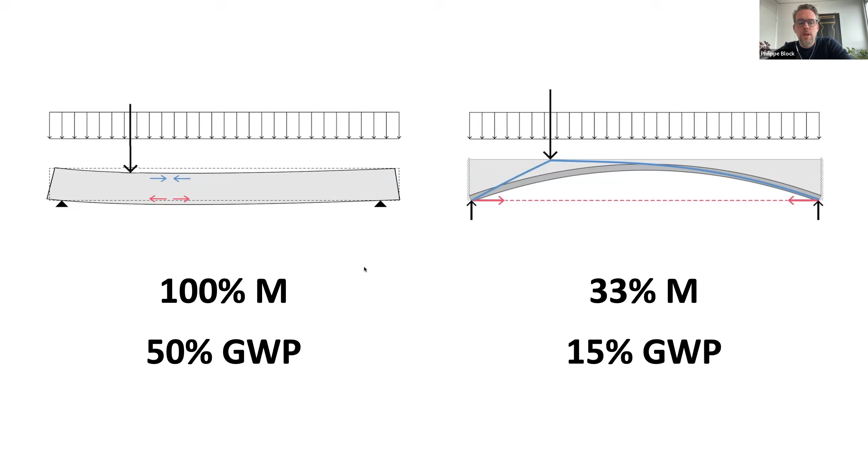And I want to maybe show you how typically things are done. On the left, that is for me, I call it the easy win. It's the low-hanging fruit. If you only focus on the material, then you have the same mass, and you have a significant impact on the global warming. On the right, you see that actually we have a bigger, of course, performance improvement on where it really matters, but also on the mass. And this mass improvement is very important. I'll show this in a real project, why this mass reduction is also so important in actually achieving a way to introduce your innovations into practice, into real projects.

So last point, circular construction. I'm happy that we are, and literally I'm not making this up, we are a couple of weeks away from setting up a company to commercialize these new floor plates, which we call the Rippmann floor system, the same Matthias Rippmann, our late colleague that designed RhinoVAULT.

So what is special about these floor plates is that we take all of the things that I've been talking about today together to make the most efficient system here. So it's prefabricated so that we can have a fast installation. It uses low strength, so low carbon material. We do a full separation.

So we have no glues, no connection between steel and the elements, so that we have this clear circularity that I argued. It's fully unreinforced, which is important towards durability. So we have no issues with potential corrosion, fire safety of the steel. And it's dry assembled. Again, remember this reversibility and so on.

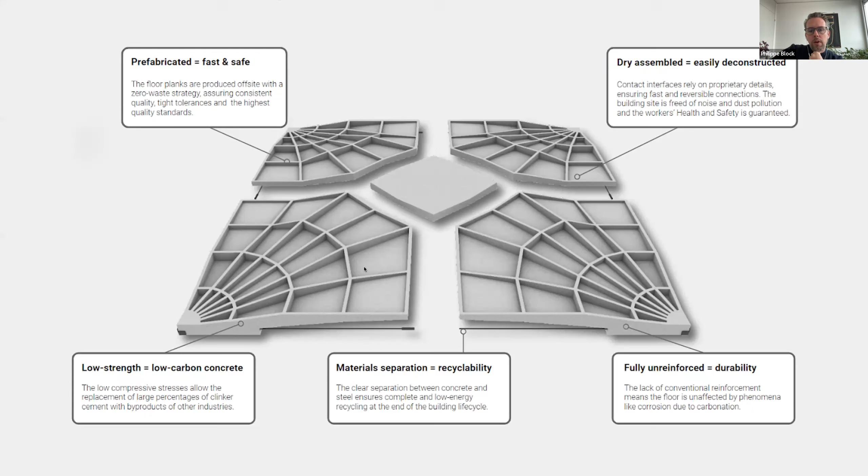So this system is now already being implemented. This is a real project. In Brussels, we're designing a 130-meter tower that has been designed entirely around this floor plate. But why I show you this slide here on the right is that, because this is a totally new concept, the client asked us to develop 4 towers in parallel in order to have all the comparisons.

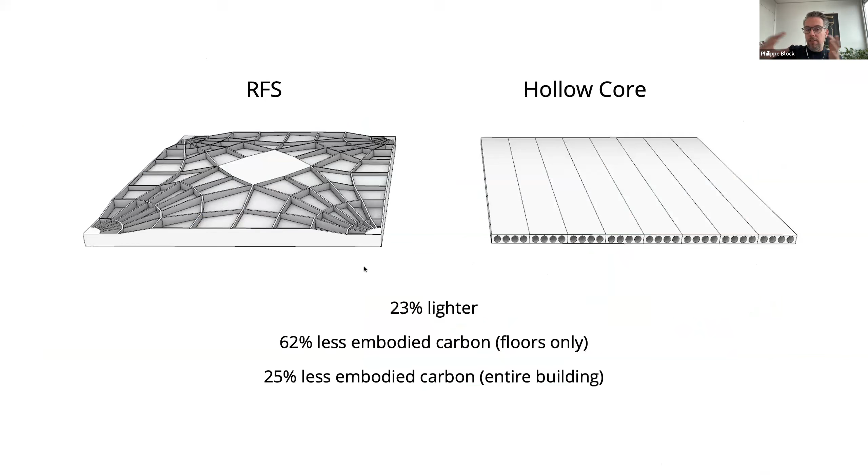And it's extremely clear that we come out not only on the sustainability targets, but also on the cost. We are so much better on the cost than any system, including timber solutions and so on. So the biggest competitor actually was the hollow core, so the highly optimized pre-stressed simple floor plans. But compared to them, we can still be 23% lighter, and we have significantly lower embodied emissions. And then again, that translates also to a big impact on the lower emissions of the entire building.

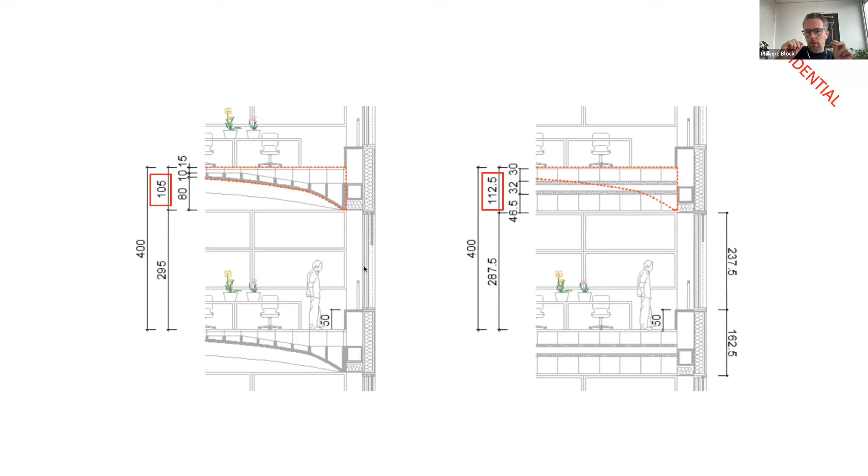Also, by not just layering all the systems, we actually can reduce the floor-to-floor height, something that is super important for clients, so that you don't have a taller building, and you can squeeze in more floors in the same height. So this is, of course, to also rethink how you integrate building systems. And the reason that we can do that is that we can activate all these cavities where typically structure is, to now start to have these building systems elegantly integrated.

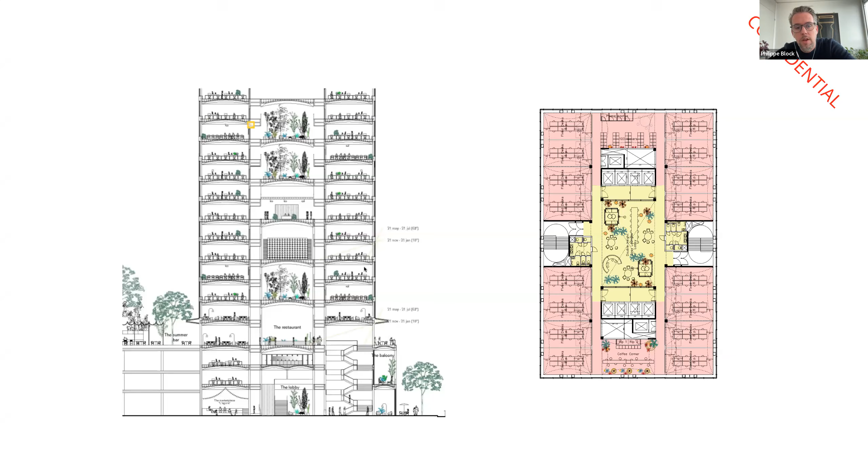So here you see a part of the section. This is only part of the tower and the floor plan. A second project is even further in development. So by the way, look out for this. We are only going to the building site in 2025, but we are now building a full-scale mock-up of 2 of those bays, so a 200 square meter mock-up together with the contractor. So we're doing a tendering phase.

More importantly, perhaps, is this competition that we have won with Gigon Guyer here in Zug. And this 10-story office building, as you can see, was also designed around this floor plate. What is exciting here is that we really had to do a lot of work in benchmarking it compared to all different floor plates. And you see that we are doing significantly better, even considering the dark gray, which is the standard transport amount that we need to add in Switzerland to follow the regulations here. But what we will be trying to do is to set up a local prefabrication factory so that we can get these emissions down as well.

You also see the timber solutions are not that great, because for 8+ meter spans, you need so much glue, so much steel and so on, that you have single-use materials that will not be able to be reused or recycled in an appropriate way. So that means that their impact is actually still rather significant. Of course, much less than a reinforced concrete floor plate, but just to make this point here as well. And I'm happy to talk about this in more detail later as well.

But what is super exciting, and I'm excited to show this to you, is that in this project, the entire team actually did a very careful analysis of what would be the real cost of the entire building based on all these different systems. So here on the left, we have the reference, a super standard, super optimized reinforced concrete floor plate in Switzerland that costs 174 Swiss francs per square meter, right?

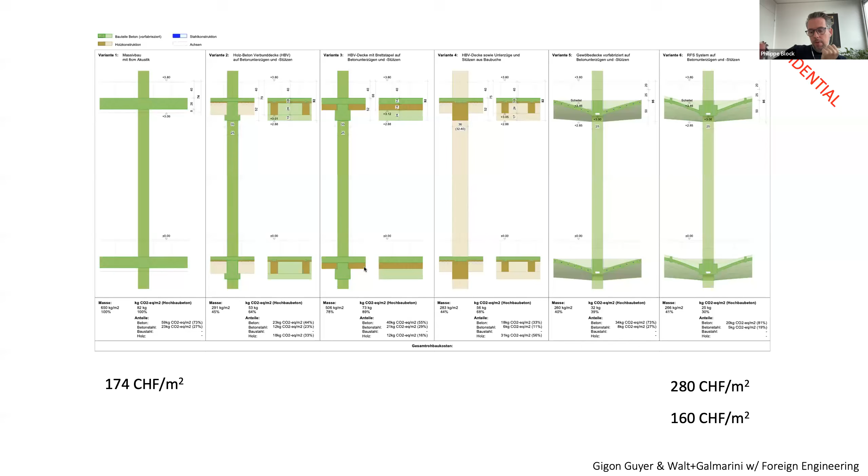Of course, what I'm excited to see here is that our business case is very solid, because you see that we have a margin of 120 Swiss francs per square meter that we can use to develop and to make this into a profitable business indeed.

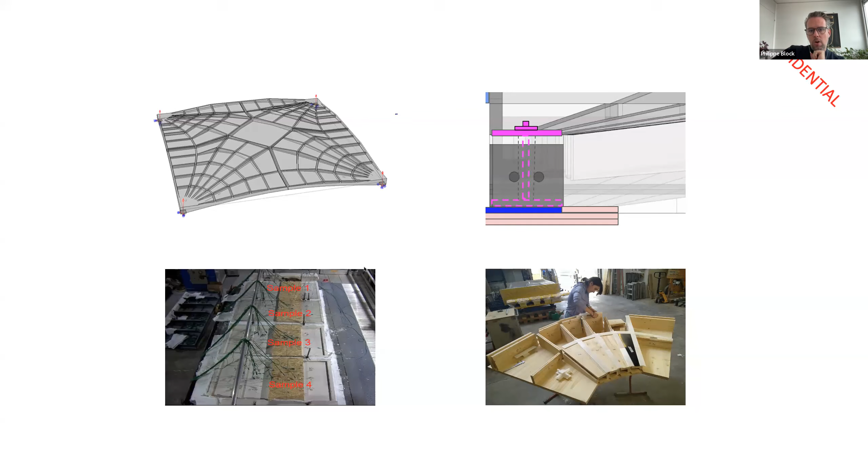On the top left, we have been developing new hybrid FE discrete element kind of analysis techniques to be able to generate these geometries and quickly check parametrically to optimize them further. And then on the bottom left, also an example, we have been doing quite a lot of fire tests, material samples, optimizations, and so on to really cover all the things that are needed, because in every single market in Brussels, in Belgium, in Switzerland, we are doing a project in Germany soon, we have to do some sort of a certification process. So there is a lot of work in the background.

We built also increasingly large demonstrators, also discretized. Here you see the hinge, how we are solving the hinge, and we're doing all the load tests to benchmark our systems and so on. And I hope you can come and visit us soon, Philippe.

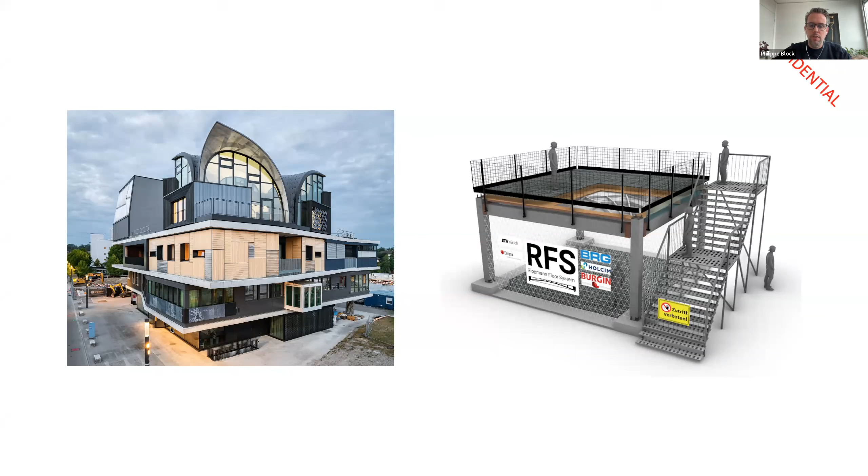Then we have to go to the Hilo project, and next to the Hilo project, we're building a full-scale mock-up for the RFS project that will feature all of the elements, the prefabricated systems, the integrated piping and so on. And I am so passionately talking about this because, again, 40% of the mass of all these buildings is in the floor plates.

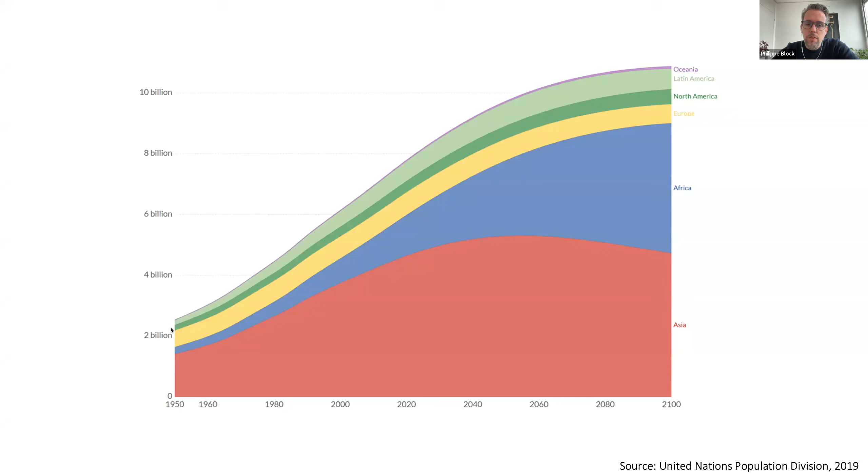I'm fully aware that most of the development will not happen where I live. Also, still a little bit where you live, but big places of expansion will be Africa, will be India, and I mean, still China as well, still Europe as well. And that is also where these same ideas actually really make sense.

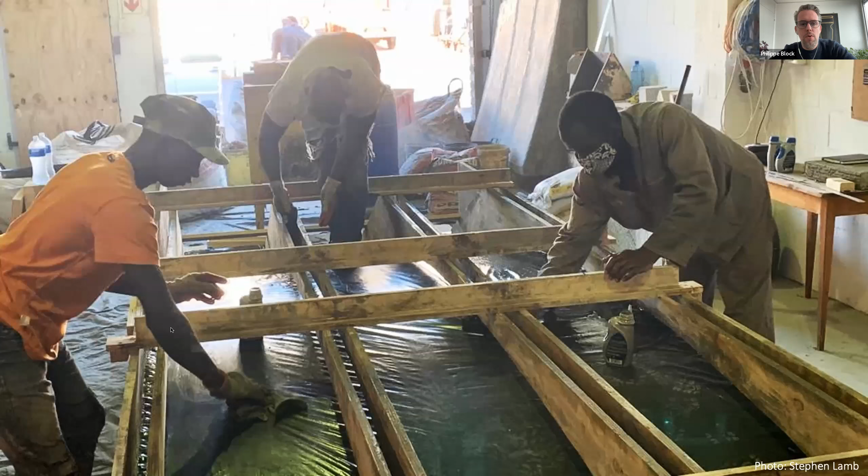And here I just want to quickly show that we are going even purer for a project in South Africa. We had a commission of the government of South Africa to use their new low strength concrete that uses, instead of stone aggregates, shredded wood, so timber waste product. And there we have done some really successful tests.

But I want to wrap up quickly because I want to have sufficient time for still a discussion, and sorry for the technical hiccups before. But Tom will talk about it in the third week, so in 2 weeks from now. But I really believe that we all need to collaborate to solve this big challenge of sustainability.

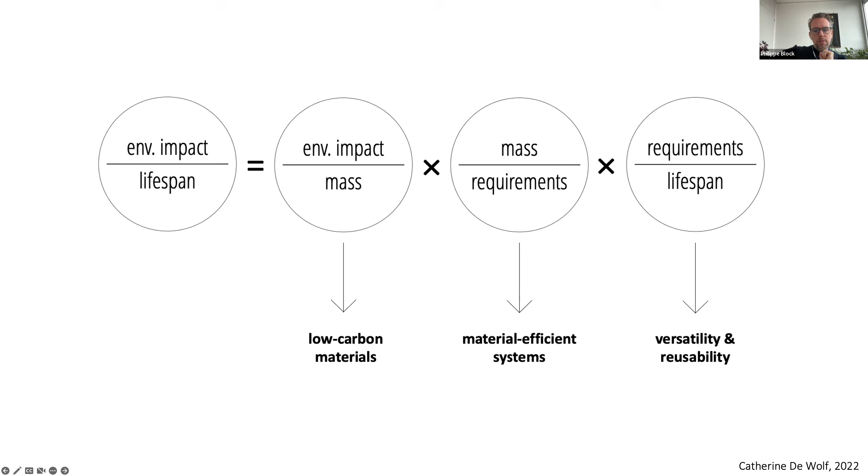Remember that I talked about these 3 levers and that it's important to have an attitude to try to achieve as much as possible of the 3 aspects. How can I activate low carbon materials? How can I reduce the mass of our structure by integrating structural rationale? And how can I, through clever design, detailing, reversibility of details, separation of materials, not gluing things together, think of the end of the lifetime, be it recycling, reuse, and so on?

So specifically, what I showed you is that we use structural geometry to reduce mass. We use funicular form to have a good geometry to reduce stresses so that we can use lower carbon footprint materials. Digital fabrication, such as direct concrete 3D printing, allows you to reintroduce structural geometry without the waste of single-use molds and so on. I talked a lot, and I hope this resonated with you.

This is an example for concrete, but this discrete masonry allows you really to push circular construction and so on. And then this will be more talked about by Tom, but you have to look at the integrated, full pipeline. You have integrated all of that to talk about really innovation coupled with economics, coupled also with productivity. That means to optimize, speed up the building site and things like that.

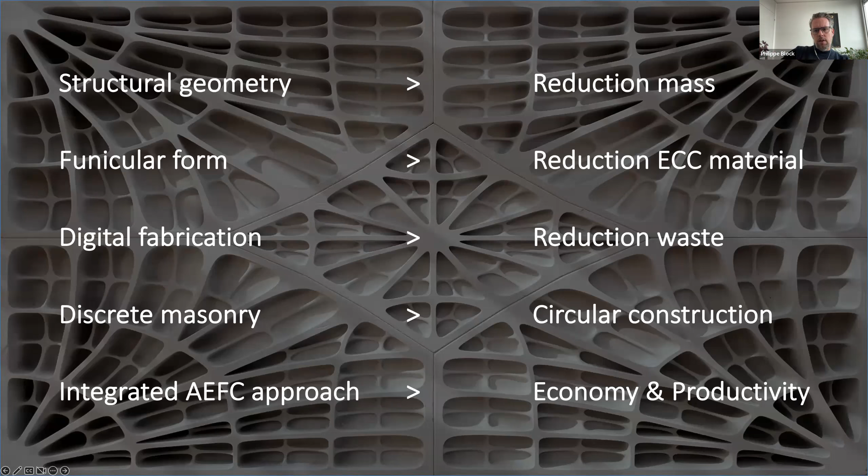Great. So thanks a lot, and bravo for the great lecture as usual. So long time no see. We admire Philippe Block a lot, especially in China, in the academic world. We introduced him several times, but every time Philippe gives an even deeper introduction of his research in NCCR. Today you can see a lot of confidential images Philippe shows us. We can see a lot of deep progress BRG and Philippe Block achieved over the past few years.

So I would like maybe firstly to put forward some questions. The floor project is quite interesting because, from the massing geometry to the height of the floor, it saves a lot of material. And this is a discrete component-based system. So the first question goes to the deformation of the whole global geometry structure system, including maybe the columns and the beams. In an earthquake, for example, the deformation for the whole system is significant. So how would you like to address the floor system?